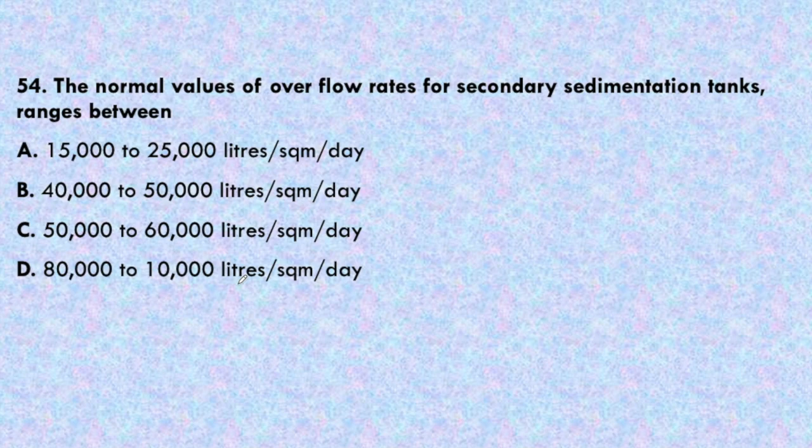Next question. The normal values of overflow rate for secondary sedimentation tank ranges between 15,000 to 25,000 liter per square meter per day, 40,000 to 50,000, 50,000 to 60,000, or 80,000 to 1 lakh. It should be 1 lakh, not 10,000 liters per square meter per day. So the answer will be A, that is 15,000 to 25,000 liter per square meter per day. This is the normal overflow rate of secondary sedimentation tank.

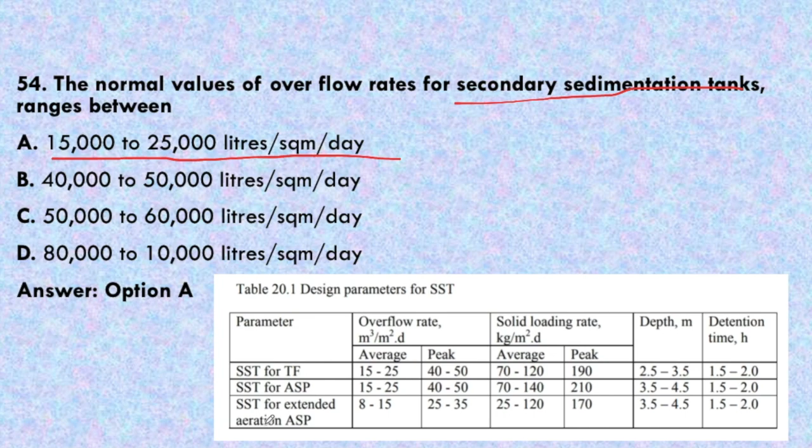You can watch it here. Secondary sedimentation tank average overflow rate varies from 15,000 to 25,000 liter per square meter per day for secondary sedimentation tank with trickling filter, as well as for the activated sludge process. Only for extended aeration this will be lower.

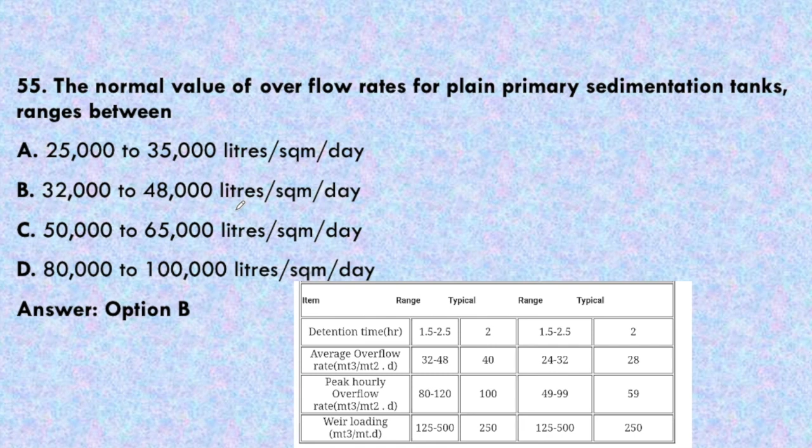Next question. Normal values for overflow rates for plain primary sedimentation tank ranges between. In the previous question it was asked for secondary sedimentation tank, and now they are asking for plain primary sedimentation tank. So it ranges from 32,000 to 48,000 liter per square meter per day. We can determine it from here, 32 to 48. You can watch the other parameters also for primary sedimentation tank, detention time, peak hourly overflow, as well as the weir loading.

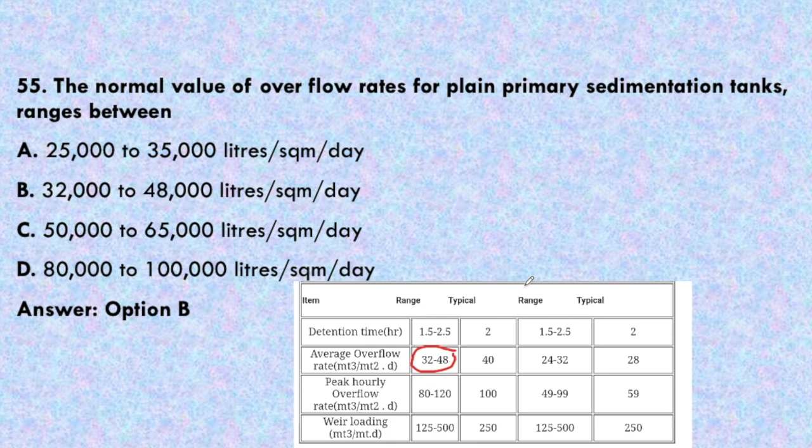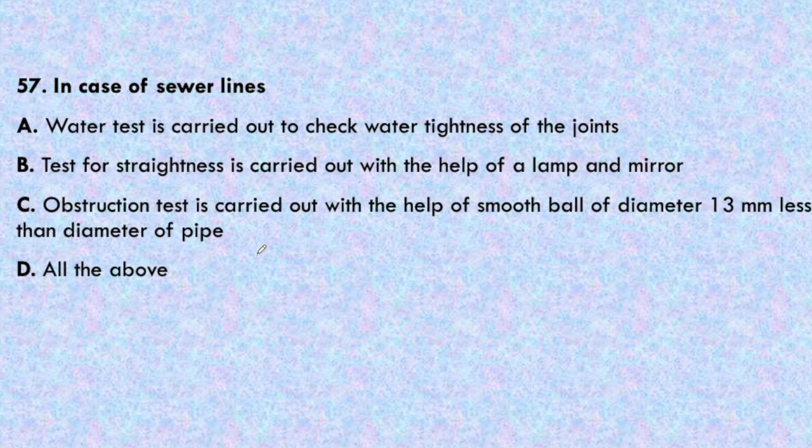In case of sewer lines, water test is carried out to check the water tightness of the joints. Test for straightness is carried out with the help of lamp and mirror. Obstruction test is carried out with the help of smooth ball of diameter 13 mm less than diameter of the pipe, or all of the above. So in this, all of the above are the correct option.

First of all, water test is carried out. It checks the water tightness so that there should not be any presence of leakage. Test for straightness is carried out with the help of lamp and mirror, in which the reflection is being observed in the mirror so that straightness can be checked. Obstruction test is carried out with the help of smooth ball of diameter 13 mm less than the diameter of pipe. So all of the above are correct answer.

Any obstruction present in the pipe can also be tested by inserting at the upper end of the sewer a smooth ball of diameter 13 mm less than internal diameter of the sewer pipe, in the absence of any obstruction, such as yarn or mortar projected through the joints, etc.

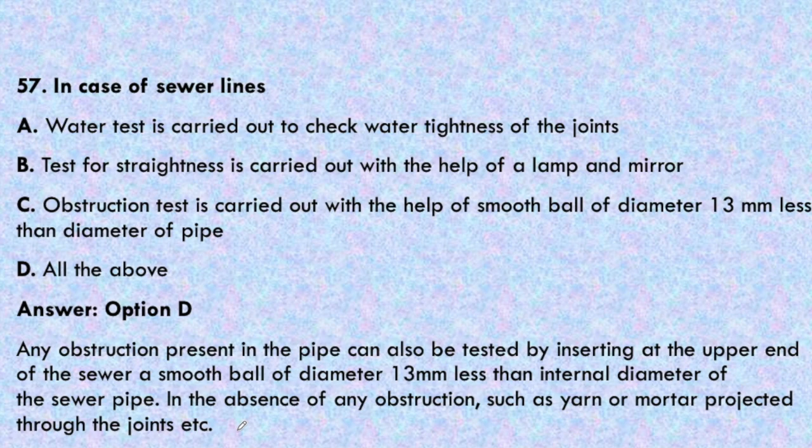Okay. Next question, if D is the diameter of the upper circular portion, the overall depth of the new egg-shaped sewer section is 1.25D, 1.5D, 1.75D, or 2D. This is important question with respect to egg-shaped sewer. In this, the answer will be 1.5D, that is option B.

How it is so? Because we can see here the diagram of this egg-shaped sewer. Let's say this diameter has been given D. If it is D, so it will be 0.5D. So overall depth will become 1.5D. In this figure, you can see that radius is B for this upper circle. So the dia will be 2B and total depth is 3B.

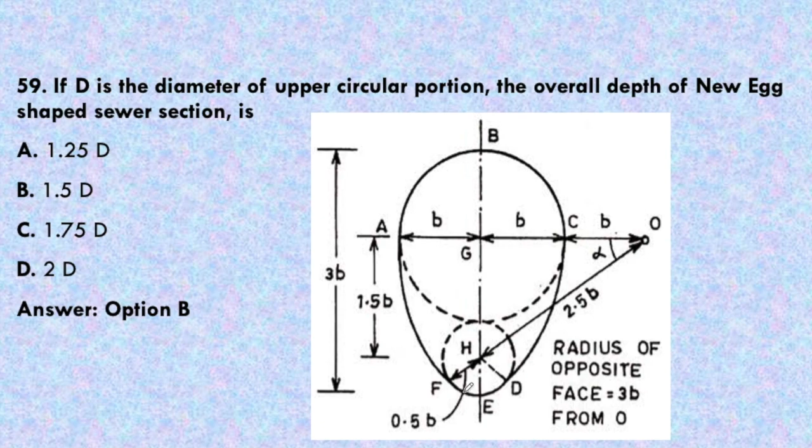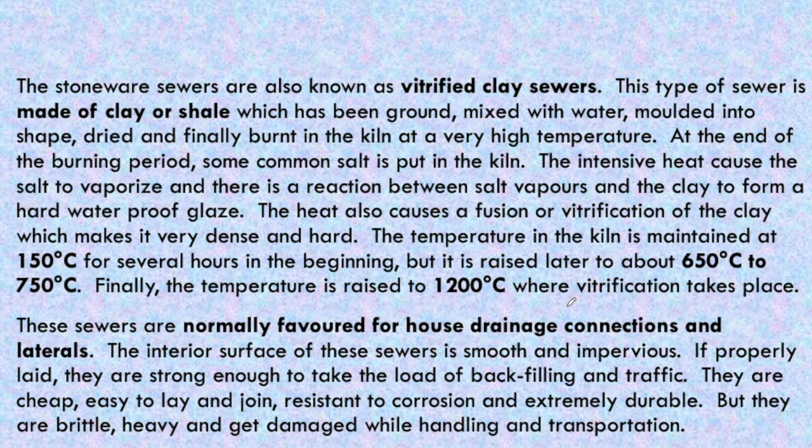The stoneware sewers are also known as vitrified clay sewers, and they are made from clay and shale. They are burnt at this temperature, initially 150 degrees Celsius, then 650 to 750. So in our option it is being given 700, so it's about the same range, and then the temperature is raised to 1200 degrees Celsius where the vitrification process occurs. Okay, so normally these are favored for the house drainage connection and laterals. You can read about the stoneware sewers very well from this paragraph by pausing this video. I am moving further.

Next question. Pick up the correct statement from the following. The maximum rate of storm runoff is called peak drainage discharge. Rational method of estimating peak runoff may be used precisely for areas less than 200 acres. The period after which the entire area starts contributing to runoff is called the time of concentration. So in this also all the statements are correct. All of the above are correct. So option D will be the correct answer. And all the statements are very important.

They should be memorized. First of all, maximum rate of storm runoff is called peak drainage discharge, which is correct statement. Rational method of estimating peak runoff may be used precisely for area less than 200 acres. Okay. So rational method is used only for the area less than 200 acres, and the period after which the entire area starts contributing to the runoff, it is called time of concentration. So memorize all this statement.

Next question. Primary treatment of sewage consists of removal of large suspended organic solid, oil and grease, sand and grit, or floating material.

So the answer will be A, that is, primary treatment of sewage consists of removal of the large suspended organic solids. I have explained primary treatment, secondary treatment and tertiary treatment very effectively in the video on revision of wastewater engineering.

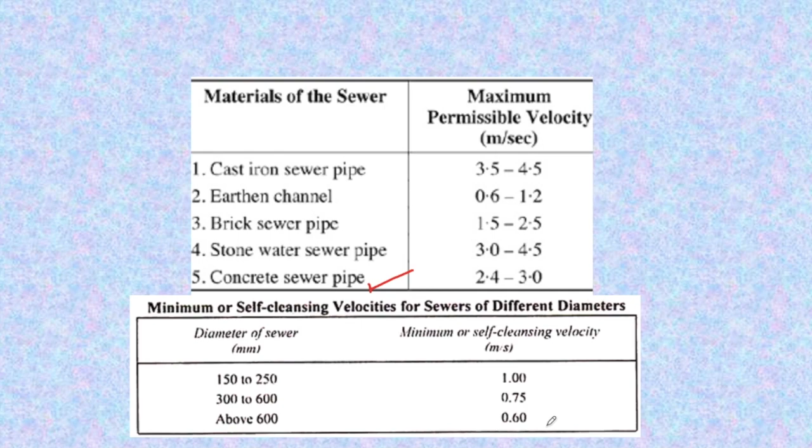And minimum velocity of 0.6 meter per second for diameter above 600 mm. Let's see, for 150 to 250 mm, minimum self-cleansing velocity is 1 meter per second. For 300 to 600 it is 0.75, and above 600 minimum self-cleansing velocity is 0.6 meter per second. So that statement was also correct, and we should memorize these values, it is very important.

Next question: the type of section adopted in trunk and outfall sewers is parabolic shaped, horseshoe shaped, egg shaped or circular shaped. Trunk and outfall sewers have to carry a huge amount of discharge, so we prefer horseshoe shaped, that is, option B is the correct answer. What is a horseshoe shaped sewer? You can see here, this is the cross section of it.

This may be used for large sewers with heavy discharge such as trunk and outfall sewers, which was the statement given. Such a sewer is suitable when headroom for construction of the sewer is limited. The invert of this section may be flat, parabolic or circular. Its height is more than its width, and its walls are inclined with a semicircular arch at the top.

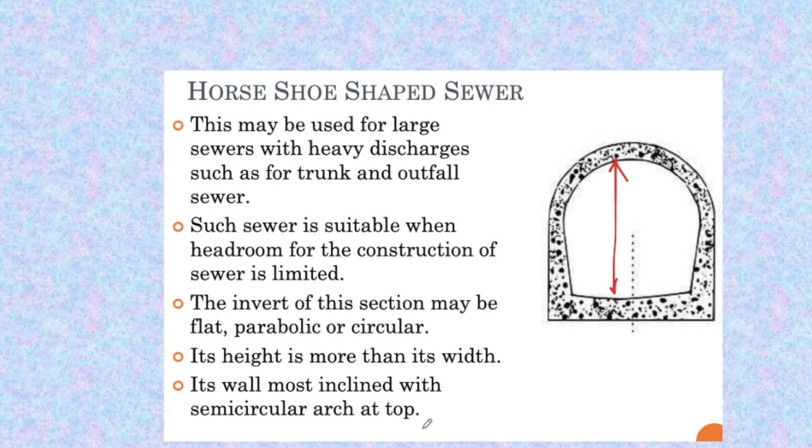Next question: the sewer which collects the discharge from the collecting system and delivers it to the treatment plant is known as? The sewer which collects discharge from different systems and finally brings it to the treatment plant is called the outfall sewer, so option D is the correct answer.

Next question: lead acetate test in the sewer manhole is done to test the presence of methane gas, hydrogen sulfide, carbon dioxide gas or diesel vapors. Lead acetate test is done for hydrogen sulfide. It checks the presence of hydrogen sulfide. Lead acetate test strips are a cheap and simple method of hydrogen sulfide detection in both water and air.

Simply dip it in the water and check for the color change. To measure H2S gas in air, wet the strip first. If present, the strip will change color. So by the color changing technique, we can detect the presence of hydrogen sulfide.

Next question: the sewer must be of adequate size to avoid overflow, must flow under gravity half to 3/4 full, must be laid at least 2 to 3 meter deep to collect water from the basement, or all of the above. All of the above is correct. First, sewers must be of adequate size to avoid overflow. Secondly, they must flow under gravity half to 3/4 full, so maximum capacity can be utilized. And they must be laid at least 2 to 3 meter deep to collect water from the basement.

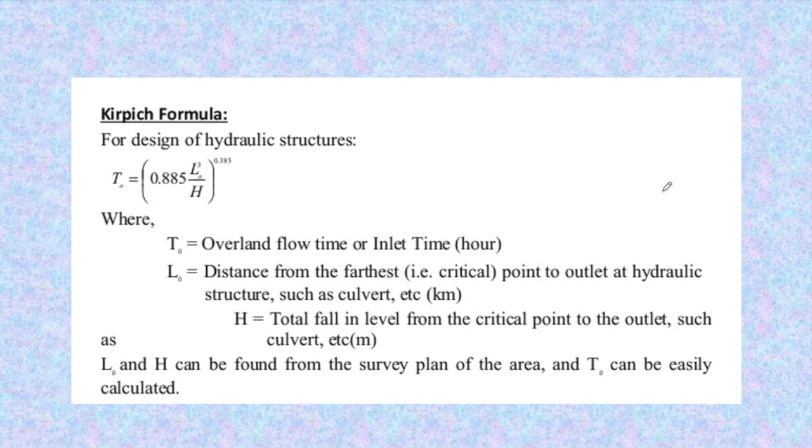If the length of the overland flow from the critical point to the mouth of the drain is 13.58 km and the difference in level between the critical point and the drain mouth is 10 meters, the inlet time is 2 hours, 4 hours, 6 hours, or 8 hours. This can be done similarly. Here also it is wrongly written; it has to be 0.885. So the answer will be 8 hours.

You can do it by your own also.

Next question. The reduced level of the string at the consecutive sight rails A and B are 203.575 and 203.475 meter respectively. If the difference in their RD is 10 meter, the gradient of the sewer line is: 1 in 100 upward, 1 in 500 upward, 1 in 100 downward, or 1 in 500 downward. So the answer will be 1 in 100 downward. Why is this downward? We can see here that the elevation is decreasing.

So obviously it will be running in the downward direction, and the gradient will be the difference in this upon the RD, that is 0.1. Where is 0.1 obtained from? 203.575 minus 203.475, divided by 10, which will be 1 in 100. This will be the gradient. This is a very easy question.

Next question. The sewer pipes carry sewage as gravity conduit, are designed for generating self-cleansing velocities at different discharge, should resist the wear and tear caused due to abrasion, or all of these. So the answer will be all of these. The sewer pipes carry sewage as gravity conduit. First of all, there will not be pressure applied; it will flow under gravity. These are designed for generating self-cleansing velocities at different discharge, and should resist the wear and tear caused due to abrasion. All are correct.

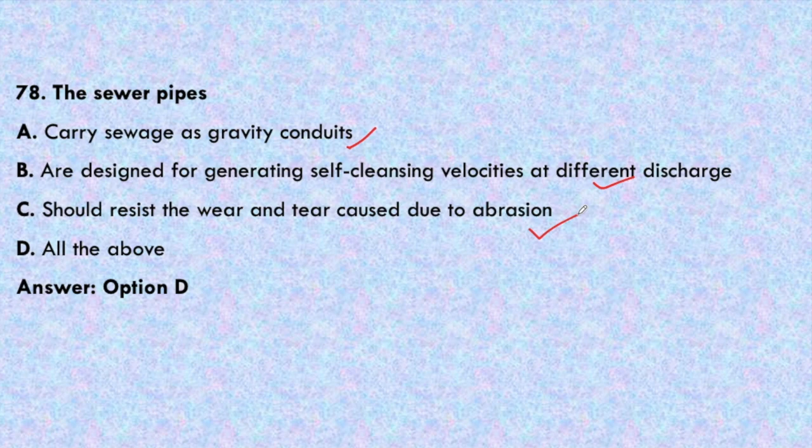Next question. The detention time T of the settling tank may be defined as the time required for the particle to travel along its length, the particle to travel from the top surface to the bottom sludge zone, the flow of sewage to fill the tank, or none of these. So we have to find the detention time of the settling tank. The answer will be C, that is, flow of sewage to fill the tank. Why is it so? Because detention time is volume upon discharge. So the time in which the discharge fills the volume is called detention time. So this is the flow of sewage to fill the tank.

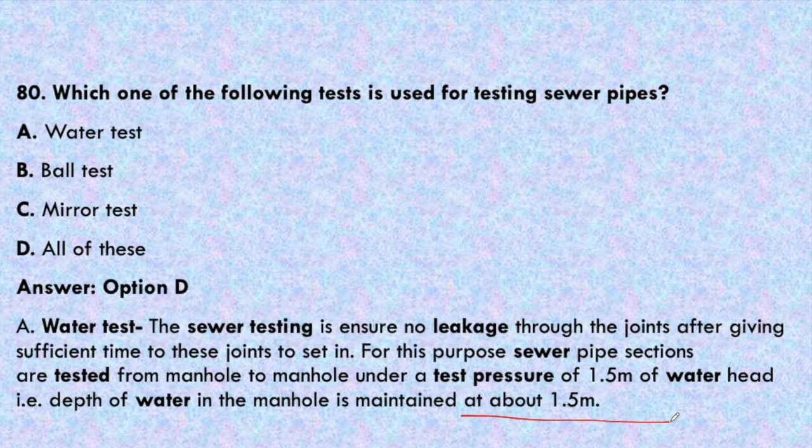Next question. Which one of the following tests is used for testing sewer pipes? Water test, ball test, mirror test, or all of these? So the answer will be all of these. All of these tests are important. Water test: the sewer testing is to ensure no leakage through the joints after giving sufficient time to these joints to set in. For this purpose, sewer pipe sections are tested from manhole to manhole under a test pressure of 1.5 meter of water head. That is, depth of the water in the manhole is maintained at about 1.5 meter. If there is leakage, this will decrease.

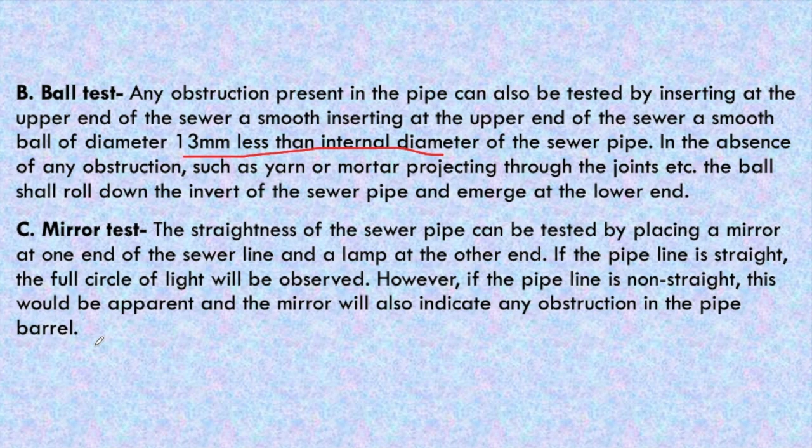So the second test, that is the ball test, we have already discussed. A ball of diameter 13 mm less than the internal diameter is placed so that we check that no obstruction is present in it. The mirror test is for the straightness of the sewer pipe, which can be tested by placing a mirror at one end of the sewer line and a lamp at the other end. If the pipeline is straight, the full circle of light will be observed. However, if the pipeline is not straight, this would be apparent, and the mirror will also indicate any obstruction in the pipe barrel. So these three tests are performed for the sewer check.

Next question. Pick up the correct statement from the following. The larger the sewer in size, the more will be the velocity. The smaller the sewer in size, the less will be the velocity. The larger the sewer in size, no deposition will take place. The larger the sewer in size, deposition will take place. So the answer will be D, that is, the larger the sewer size, the more deposition will take place. With a larger sewer size, it is not certain that velocity will be more, and it is also not certain that with smaller size the velocity will be less. For a larger sewer, we can only say one thing, that there will be more deposition.

Next question. Pick up the incorrect statement from the following. The mixture of water and waste product is called sewage. This is a correct statement. The treated sewage effluents are generally used for irrigating crops. This is also correct. The process of collecting, treating and disposing of the sewage is called sewerage, which is also correct; that is the definition of sewerage. The old conservancy system was definitely better than the water carriage sewerage system, which is a totally incorrect statement. So this will be the incorrect statement, that is option D. The old conservancy system was totally unhygienic; that is why it is obsolete now, and only the water carriage system is mainly used.

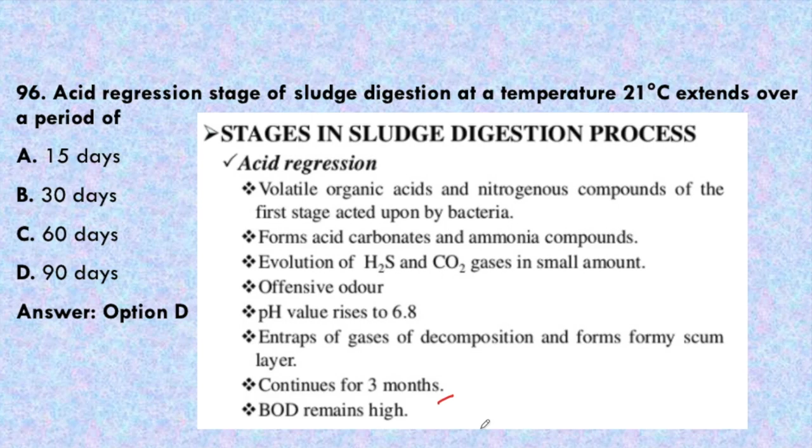Next question. For non-scouring velocity 5 meter per second, the type of sewer generally preferred is cast iron sewer, cement concrete sewer, glazed brick sewer or stoneware sewer. So for non-scouring velocity, this is very high velocity, that is 5 meter per second. We have already seen it in one of the questions. This much velocity can be achieved only in case of the glazed brick sewers. Okay, glazed tile or brick sewers. Answer C will be the correct one.

Next question. A manhole is generally provided at each bend, junction, change of gradient or all of these. So obviously manhole is provided at all of these, at bends as well as at junction and change of gradient. Where there is any change in the pipeline cross section, the direction or alignment or dia, then there will be provision of a manhole.

Next question. Removal of oil and grease from the sewage is known as screening, skimming, filtration, or none of these. It is also very easy question. Oil and grease are removed by skimming method. Okay, we have already discussed skimming method in the previous video of these 200 questions. So option B, that is skimming, will be the correct answer.